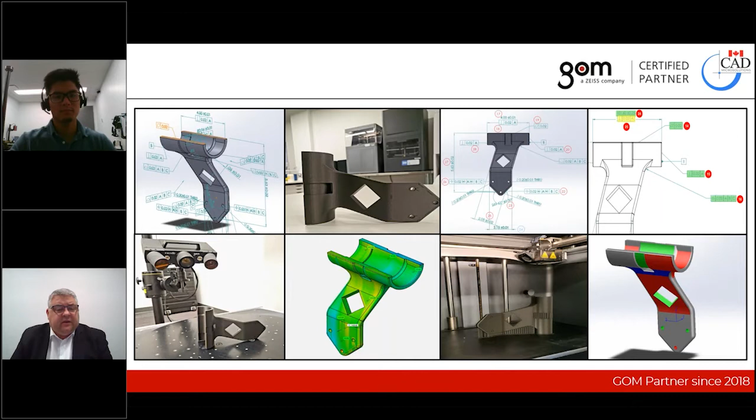We'd like to jump right in with three basic poll questions. It should just take us a few seconds to put together, and then we'll move right into the presentation.

So the first question here is, have you or your company ever investigated switching to MBD? If you don't know what MBD is, that's what this presentation is about, but it stands for model-based definitions. So either yes, no, or unsure, and then we can quickly go on to the next one.

How are you currently doing your FAI? So if you are involved with quality control at your company, and you've measured a part, whether it be by hand or CMM or a gauge or a robot, how are you currently doing your first article inspections? We're just curious about that to gauge the audience, whether it be a Microsoft Excel form, a report, a stats package, or other. Your input on that would be greatly appreciated.

And then we have one more quick question. Do you know SolidWorks MBD and inspection work together? A difficult question because if you don't know what MBD is, you don't know if it can work together. But essentially, yes, no, or not sure, because we're going to show you how they can work together afterwards.

All right, so at this point, we're going to get started. In this presentation titled Structured Framework for Engineering and Inspection, we are going to focus on the new features of SolidWorks MBD and SolidWorks Inspection, including features within the add-in modules and the standalone client modules. We'll also be showing you how these two things can work together. Lastly, we're going to illustrate how these new features can be used with additional tools to create a robust, closed-loop inspection system. Many of the roles required to carry out this closed-loop system include team members from both engineering and inspection departments. We'll also highlight how some of the tools touch other software packages where the user can exit or continue on with the loop. Let's get started.

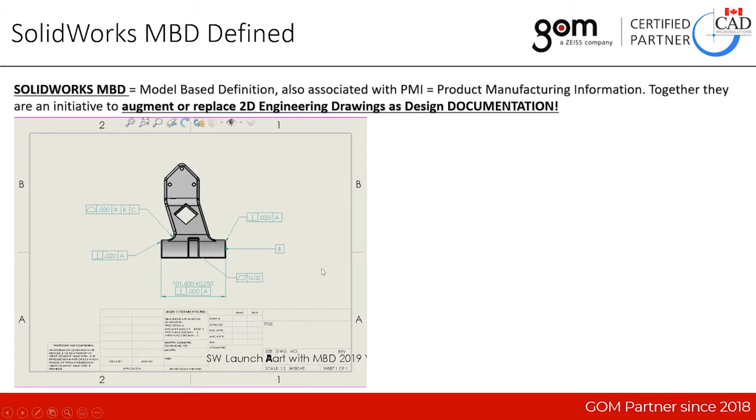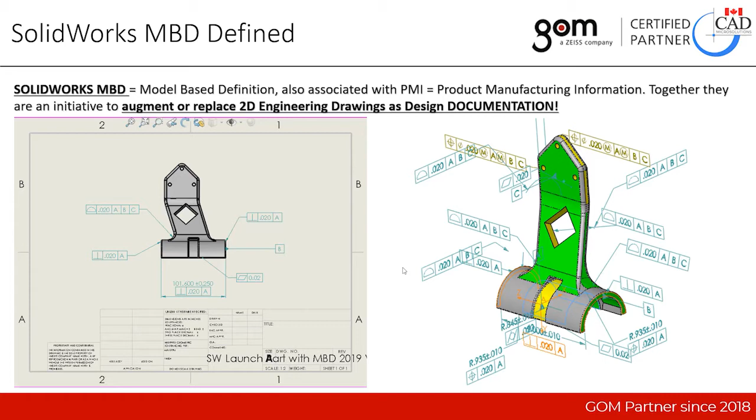SolidWorks MBD is model-based definition. It's also associated with PMI, product manufacturing information. Together, they are an initiative to augment or replace 2D engineering drawings as design documentation. What that means is we've traditionally looked at parts with 2D prints. Obviously, the more complicated the part, the more complicated the print. And we're transitioning from this sort of documentation into MBD, which is tagging all of the 3D attributes on the part with their related dimensions, GD&T, or notations.

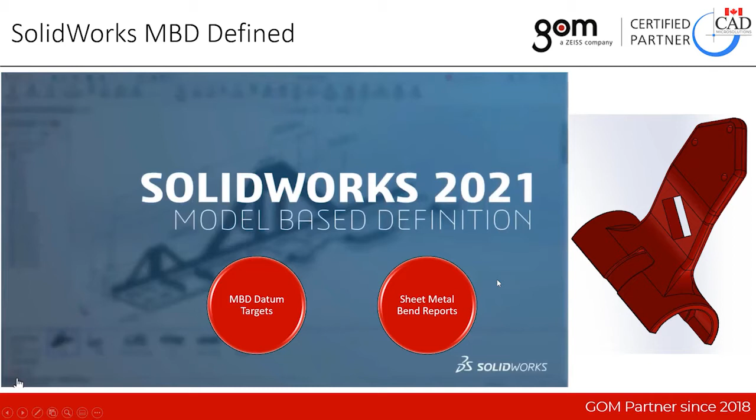SolidWorks 2021 model-based definition has two big upgrades: one called MBD datum targets, and the other sheet metal bend reports. Now, in the part we're going to be carrying throughout our presentation, this plastic injection molded part that the additive manufacturing group used in their presentation, and we'll be sharing this afternoon as well, it obviously doesn't have any bend reports, and if you'd like any information on that, you'll be able to find it on the web later. So we're going to focus on the MBD datum targets and show you one of the really nice, cool new features in 2021. So let's switch over to SolidWorks 2021.

And here you can see the same part with several pieces of MBD already tagged on it. And to show the new datum target feature, I'm going to zoom in on datum C here, which you can see is this small plane.

I'm just going to go to my MBD tab and select datum targets. Now what's interesting is, why would you use a datum target?

These are often used if you want to define inspection points or assembly points or anything like that. You're able to identify regions on the model where you want to pick. You simply assign where you want to put the label. You can do some more advanced things, such as assigning a target radius that the target has to lie within, and then just a location for the flag.

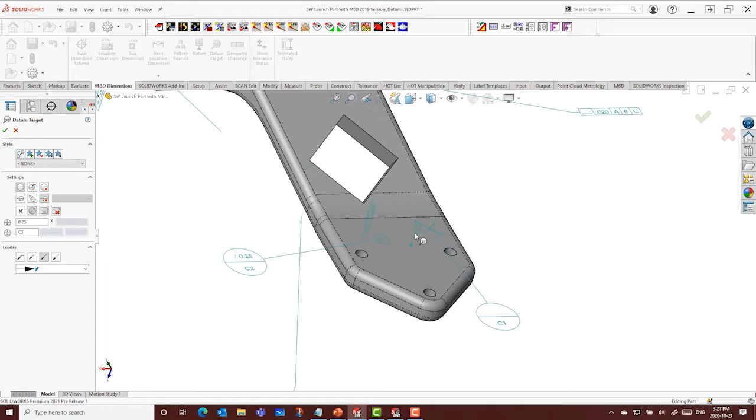What's interesting to note here is that you can also use your standard SolidWorks toolkit and actually assign parametric dimensions to these datum target locations. So if I wanted to control where that target was relative to another feature, I use my standard dimensioning tools to assign where it needs to be.

So I'll just do that for each one, and again do that for the other one over here. So what it allows you to do is, if you've got applications where you want to assign datum targets to MBD dimensions or to your model via MBD, there's now a mechanism to do so.

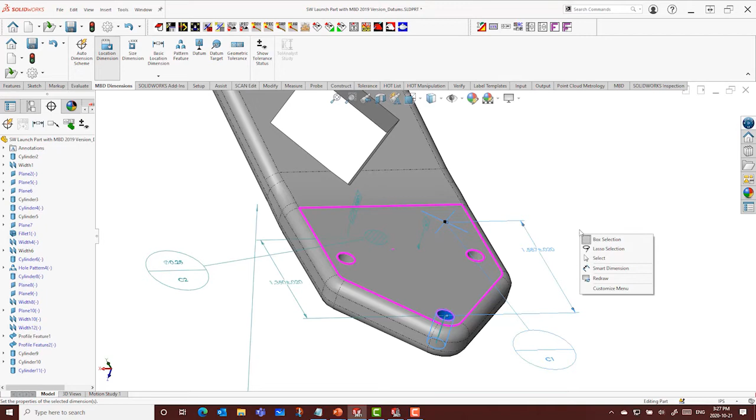While we're in this MBD world, I'd like to share with you another tip and trick that was recently shared to me by one of our partners, and that's the ability to balloon labels right inside of the MBD itself. So if you look at this kind of call out here, one of the things we'll be talking about is the ability for SolidWorks Inspection to do this.

But if I simply click on the dimension and look at the tree control, I can come down in here and actually use some new notation that was shown to me, where we can put some things in brackets. Whatever's in brackets is going to appear on the label.

I want the symbol to show a circle. I'm going to be identifying it as a number, and I'm going to start at the number 1. Very similar to what you may see in SolidWorks Inspection and the ballooning, we can also put these tags on the MBD dimensions as well.

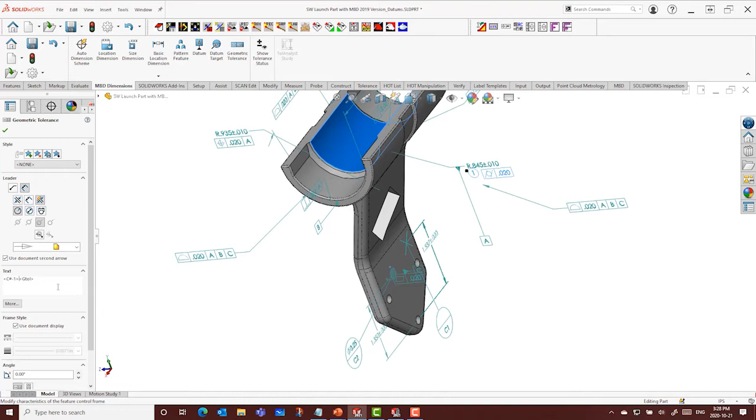Now we have to do it one at a time, but it's still a valid way to do it. And you can see there that I've now put the number 1 sign on that concentricity. A really nice new little tip and trick feature.

So if I wanted to do that again, I could just come down here and add the necessary file structure to do that. I want, in a circle, a number, and this time I'll call it number 2. So that's another neat way to uniquely identify different characteristics or dimensions that you want to control at the MBD level.

And again, whenever you're doing projects like this, because they're all SolidWorks objects, one of the really nice things we can do is, if I just capture this view as an example, I'll say capture 3D view and hit OK.

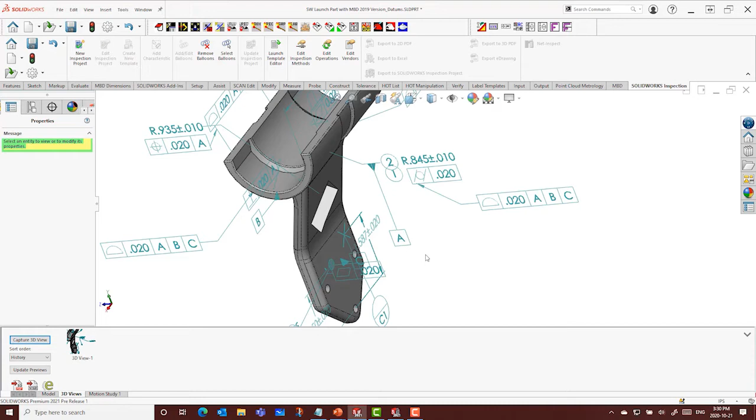What I would like to share here regarding the MBD and the new features is you can also post this out to eDrawings. So if I go out to produce a generic eDrawings report out of this, you'll notice on the back end when it appears, I've got the new datum target symbols and some other special new features about how to interact with the MBD inside of an eDrawings.

So a nice way, you can obviously recall specific views that you had in the drawing before. If you highlight dimensions with the balloon, it shows you on the model which ones. So a great way for you to share between OEM and supplier the dimensions that you want to control and how to communicate that information without having to do it the traditional route of Excel sheets or things like that.

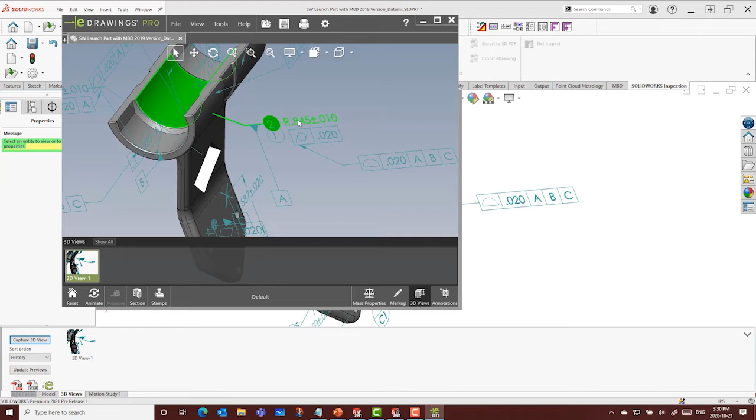So I just wanted to share those two additional things with you. Again, the major new upgrade inside of our update in SolidWorks 2021 for MBD is the assigning of datum targets and being able to dimensionally control them with standard SolidWorks tools.

So without further ado, we're going to move on to what is SolidWorks Inspection. I'm just going to jump back into my PowerPoint presentation. And what is SolidWorks Inspection? So you've heard me mention that we can already assign balloons to things and control elements to objects.

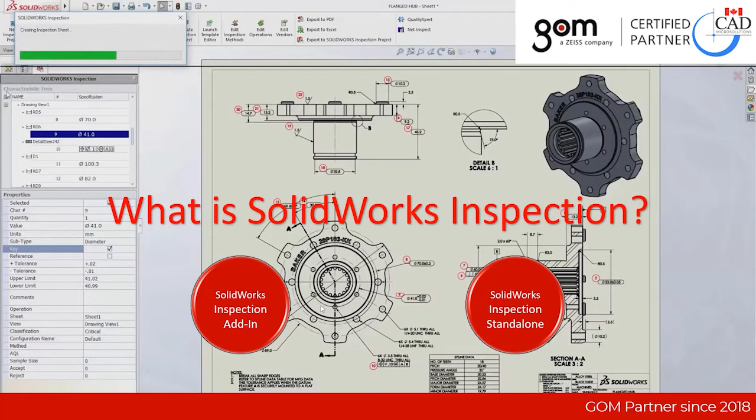What is SolidWorks Inspection? SolidWorks Inspection is used to create documentation to communicate dimensional or inspection requirements. At a high level, it balloons your drawing. So ballooning at the MBD level was one way to do it. Doing it with these red targets now is another way.

It's a separate software module, but it has a lot more value-added features than just putting those balloons on there. You can do it with SolidWorks drawings, or actually drawings and PDF files from external to the SolidWorks community as well. So if you've just got a PDF file, you can use SolidWorks to do this as well.

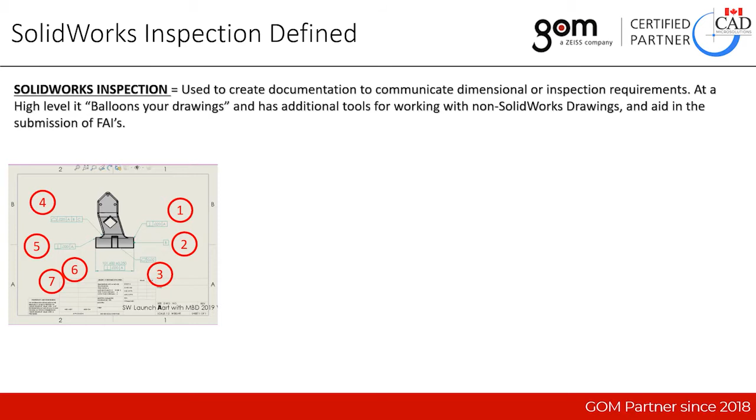Traditionally, what this looks like is you can bring in a PDF file. Here's the same one I had on a slide before, and go through the process of assigning a number to these drawings. The reason we do that is we give these marked up drawings to inspection, or to our supplier, or to an inspector, to say we want you to check dimension number 1 first. Give it to our CMM programmer to say, when you program this flatness, it has to have this number on it, so we can identify on the CMM report or inspection report and have a correlation between the two.

Regardless of whether it's manual or DCC type programming, the output is obviously to produce an inspection report that shows if the part or process is good or bad, and link that back to the dimension numbers. You can see these don't really align, because I've got 9 over here and only 7 over here, but it's just an example.

So again, we often have to produce those first article inspection reports, or FAIs, and either include them with our part, or send them ahead of time so somebody knows what we're shipping them was checked, and there's traceability to that. After all the approvals, it's obviously ready to ship.

The challenge with that current method of ballooning drawings, writing CMM programs, and producing Excel sheets with specific layouts is that they're very time consuming. It's something that's been done a long time, and people are transitioning away from this manual type approach. SolidWorks Inspection is designed to automate this and contribute to the overall workflow right to the point of traceability.

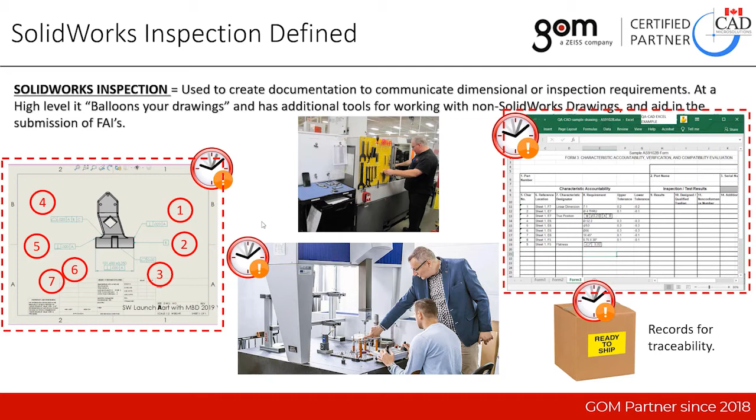Again, SolidWorks Inspection is not related to the actual inspection of the part—you're still relying on tools, calipers, CMMs, and gauges to do that. We're going to leverage the front end and the back end of that data flow to capture and share the information correctly. So, what's new in SolidWorks 2021?

There's been a couple of small additions, and then we'll do a live presentation on what I think is the biggest value-added function. In the SolidWorks Inspection add-in, there's actually a new template folder structure, so that if you've got multiple users, multiple environments, or multiple computers pulling off the same source, all your inspectors and people can be pulling from the same template file, with a bit more value-added control to allow you to control those templates.

It's a really nice new feature on the add-in side, and I'll show you a little bit of that in a few minutes. On the inspection standalone, or what I call the client side, there's been two really nice upgrades. One is these new VDA type target symbols—it's just a type of symbol where instead of just putting a circular dimension, you can now put a VDA style balloon.

Another feature here is the grid function. The grid is now customizable, so it's really nice—you can control the number of grids in both the vertical and horizontal plane, and go from there.

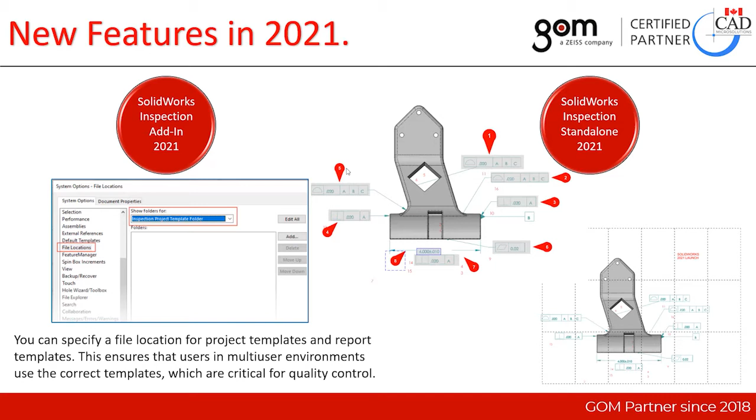What I'd like to show you is what I think is my favorite new feature of SolidWorks Inspection, one I think you'll get a lot of use out of. I'm just going to switch over to my client here. So here I am in SolidWorks Inspection 2021, and I'm going to start a new project, and select just my default template. What's new—in the past we would have typically picked off of PDF drawing files, or SolidWorks Inspection 2D files generated from the add-in function. What's new in this version, and you'll see at the very end, is the ability to open up an actual SolidWorks part file. So I'm going to show you this really cool new function—I'm going to pull it from my demo files, call it for the client, and hit open.

Yes, I know I'm in beta mode.

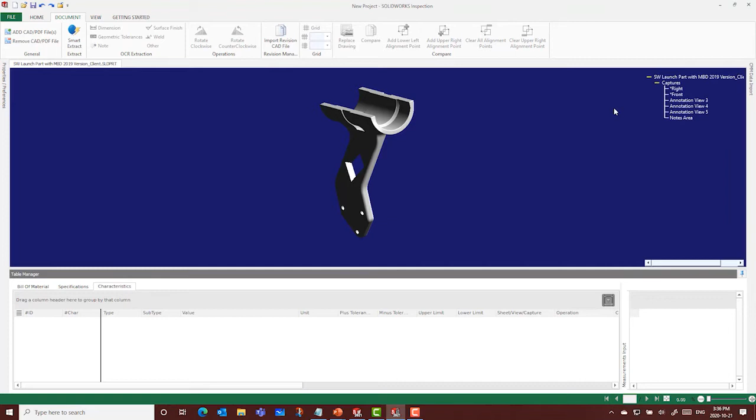What you'll notice is that we get a 3D model view from our SolidWorks file. Right now it looks pretty plain, but if you notice up here, we've got a new pull down. When we click on it, we can double click to get it in the view that we want, and it'll show all of the dimensions, all of the MBD associated with that view.

We can then right click on it and say extract dimensions. A really nice new function that goes through the database, goes through the SolidWorks file, reads the MBD functions, and creates the layout for us. It creates this kind of report file that we can link to and do other things with once we've actually measured the part. A very, very cool new feature.

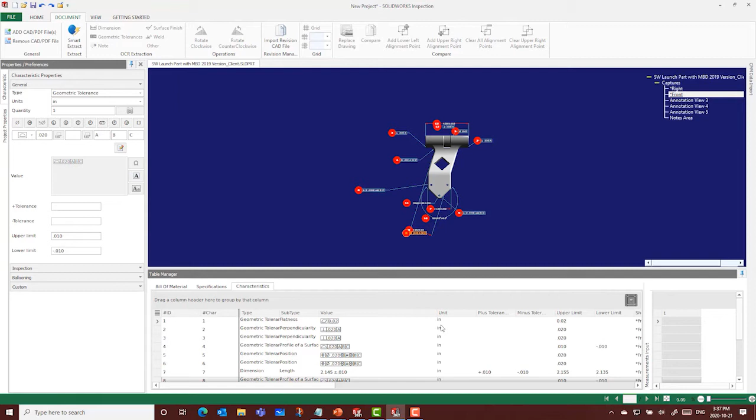If you've used MBD on your model to begin with, you can leverage that information downstream. Rather than having to create 2D drawings and all the associated work, which SolidWorks inspection can do on its own, you can go straight from SolidWorks with the MBD in it right into the client and save a lot of time and money. You can create all your standard reports, PDFs, and documentation from here.

What I'm going to do is take a step backwards, because we've taken a big step forward showing you this new function of how, on the client side, we can take advantage of MBD and SolidWorks inspection together.

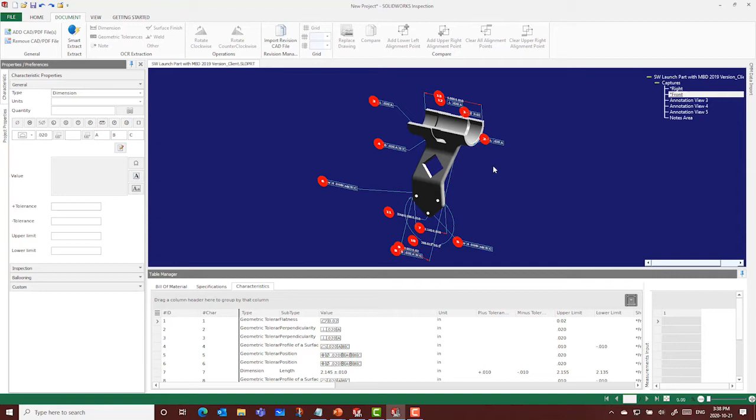I'm going to loop back into my SolidWorks inspection folder, my SolidWorks main view, and show you how that can also work in design mode. I'm going to close this one, don't save, say file open, and open up the full part model this time.

It's got a lot of MBD on it, we just cleared some of those things up. One of the neat things you can do with this same MBD, a small part with lots of information on it, is use SolidWorks inspection. This is where we use the add-in to walk through our CAD model and assign balloon numbers.

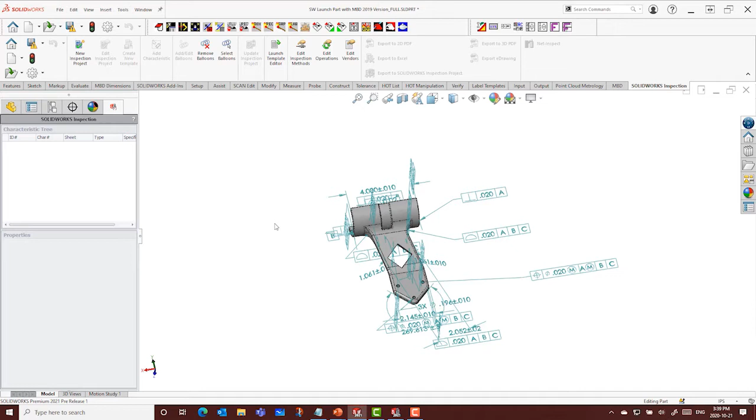Based on the objects, so you may or may not have seen this before. SolidWorks inspection has been used a lot at the 2D drawing level, but you can see it's actually going through and labeling everything associated with an MBD function — using SolidWorks MBD and SolidWorks inspection together.

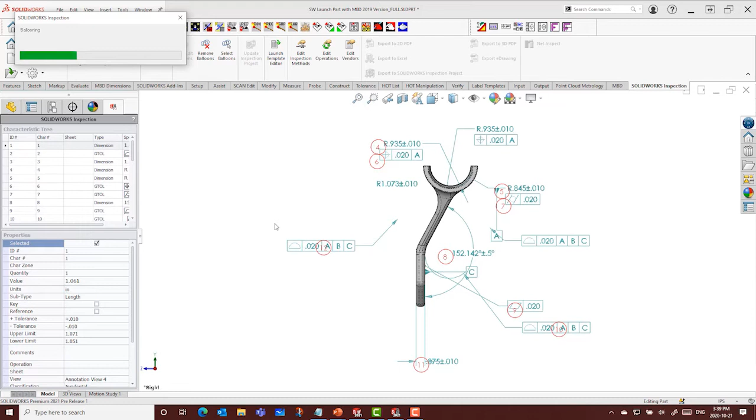The really nice thing is that it's doing this in 3D space, saving each individual view. So if we went out into e-drawings, it would save all those views — great for sharing information that way. I'll just let it finish up here and spin it around.

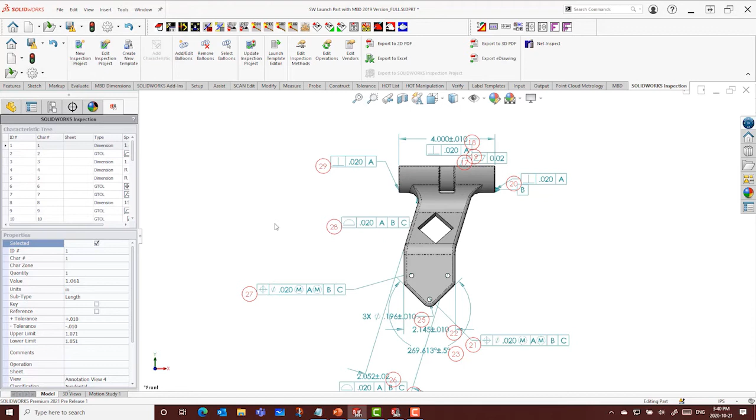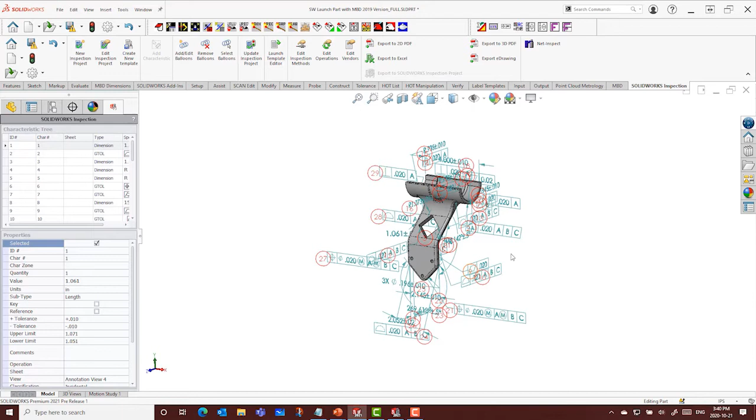So you can see now that we have all of the balloons, and you can export straight to an e-drawing from here. We can publish to a couple of other different formats for producing FAIs, because we haven't actually measured anything at this point.

That's a great segue, because now that we've shown you a couple of new features of SolidWorks and how this impacts downstream, the next step is we need to go through the measuring process. I'm going to introduce David from our team, and David's going to show you how we would take a model like this with MBD on it and use it in the inspection process.

Thank you, Rob, for the introduction. Good afternoon everyone, my name is David, and in this portion of our presentation I'll be taking you through how we can use 3D scanning technology to go from a physical part that we have, and in a matter of minutes, arrive at a full inspection report that lists the quality of our part through the use of inspection capabilities in GOM as well as SolidWorks.

So to start off this presentation, let me first take you through an introduction of who GOM is as a company, and talk about the type of technologies that they provide from the world of 3D scanning and inspection.

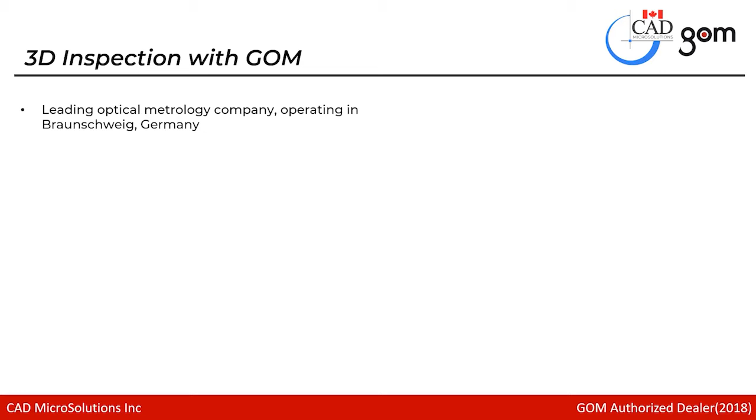GOM is a leading optical metrology company currently operating in Braunschweig, Germany, and they offer contactless, accurate inspection capabilities through the use of optical 3D scanning technology. They provide rapid, high-resolution capture of data through the use of these 3D scanners that make use of specialized cameras.

As well as fringe projection technology in order to produce a detailed point cloud of the data. Once we have this 3D point cloud, we can polygonize it to turn into a smoothed out mesh, which we can then use in the GOM Inspect software to calculate our measurement results. So whether we want to check for common elements such as dimensional analysis, GD&T characteristics, we can also do full 3D surface comparisons as well as material thickness plots, create inspection sections to analyze across a certain plane, and much more through the use of GOM technology.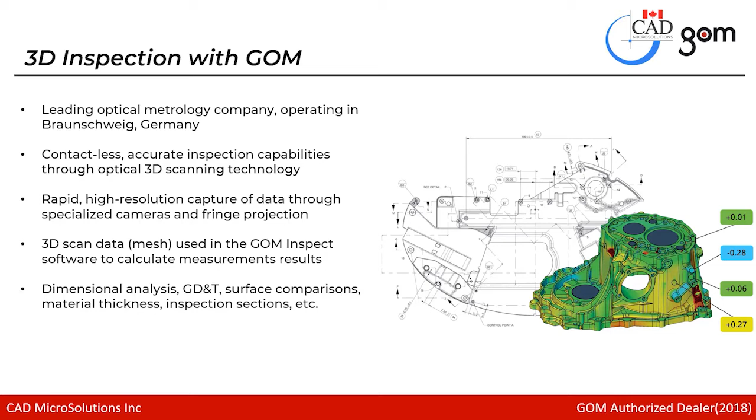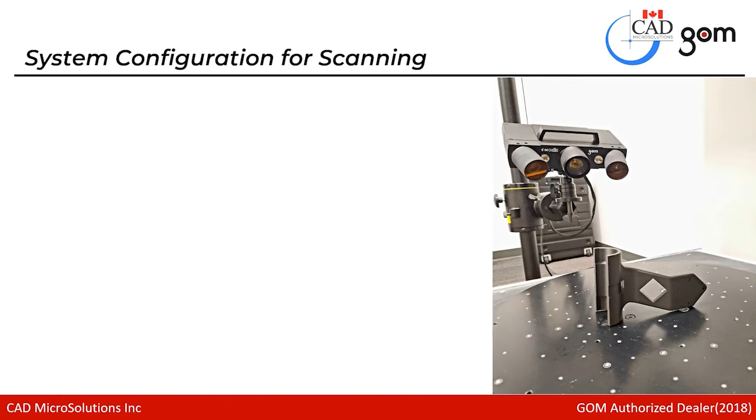Now that we're a little bit more familiar with GOM as well as the type of solutions that they provide, let's take a look at an example of a system configuration that's used for 3D scanning. Here we have a picture of the setup that was used to scan this part, and we'll quickly go over the different components that make up this overall system.

First up, we have our ATOS Q 12 megapixel sensor, which is able to capture 12 million points of data with a single scan, and it's installed with a 500 millimeter measuring volume. The measuring volume simply pertains to a boundary box of which the part that we want to scan must fit inside reasonably for us to be able to capture all the geometry of the part in an optimal way.

In order for us to be able to scan larger or smaller objects, we would need to adjust the measuring volume of the sensor accordingly. This can be done either by changing out the sensor to one that has the appropriate measuring volume installed, or in the case of our ATOS Q, we have a flexible system where we can uninstall the lenses and then install a new set of lenses that will either increase or decrease the measuring volume as we need.

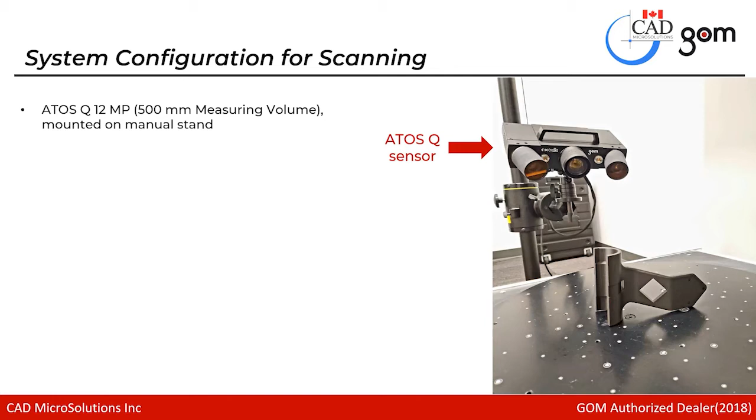Our ATOS Q sensor is also mounted on a manual stand that we use to reposition the sensor itself. So whether we want to change the angle of attack or if we want to increase the height or depth of the sensor, we can do this with the help of our stand. The reason for this is so that we can get our camera to be able to be placed in the optimal view to capture the remaining geometry that wasn't able to be picked up by previous positions.

Next up, we have our automated rotation table that's synchronized with our sensor. The reason we have this table is so that we can automatically have it rotate the part to get it to a new scan position. Then once it arrives at its new position, the sensor will automatically go ahead and take a scan of the part.

So we can program this in the software to either run a set number of increments out of a full 360 rotation and repeat that as necessary, or readjust the programming as necessary to capture the data in the most efficient manner. This is all connected to our computer, which is running GOM Inspect Suite software. The software is used for system operation as well as for inspection processes later on once we capture the data.

You'll notice as well on the table itself that there's a number of different markers that have been placed, and these are known as reference points. Reference points are used for the purpose of tracking, self-regulation, and to combine separate scan series.

These reference points are the system's way of determining where it has moved in relation to the original position of the part, so that no matter where we position it, whether we reposition the sensor with our stand, or if we rotate the part with our manual or automated table, the software is able to always have that recognition of its orientation relative to the part. This way, whenever we take a new scan, it knows exactly where that new scan needs to be located because it has that knowledge from the reference points.

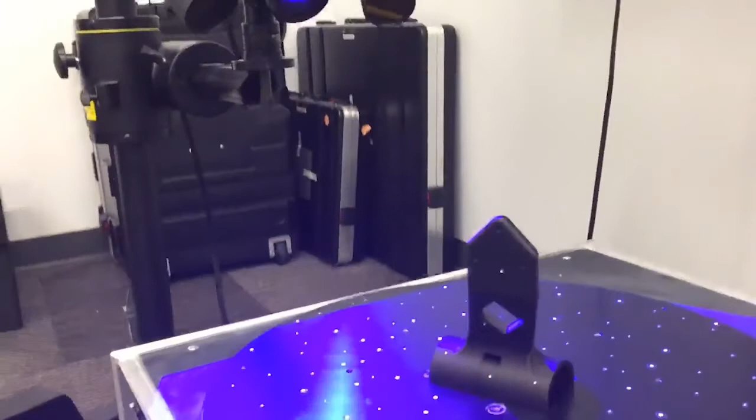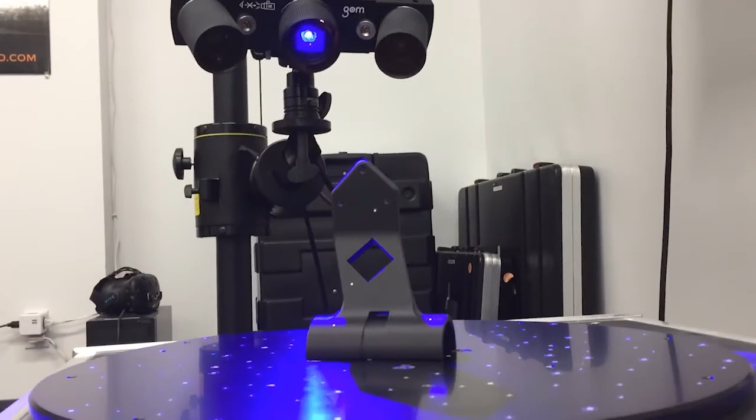Here we see our ATOS Q being used to scan the part with our automated rotation table. The Q projects a blue light fringe projection pattern across the surface, and based on how these patterns deform according to the surface geometry, the cameras on the left and right calculate 3D point clouds of data to populate into the software.

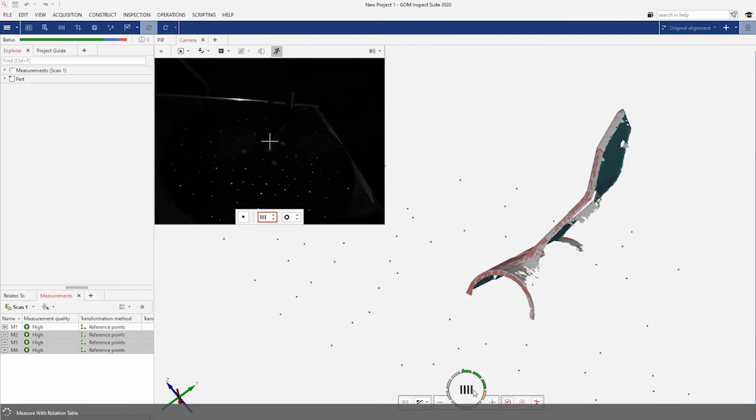Now that we've switched to the software view, you can see those reference points on the table and the part being recognized with a unique value. As we move through the 10 different positions of this full rotation, the sensor knows exactly where it has moved relative to the part, and the software puts the new scan data into the correct positions as we see here.

We continue this process to capture any geometry not picked up by previous scans, by either repositioning the sensor or repositioning the part, and continuing to scan until we're satisfied with the results.

Now let's take a quick look at how we can transform scan data to align them into a single source, and then polygonize the result to create a final smooth mesh profile.

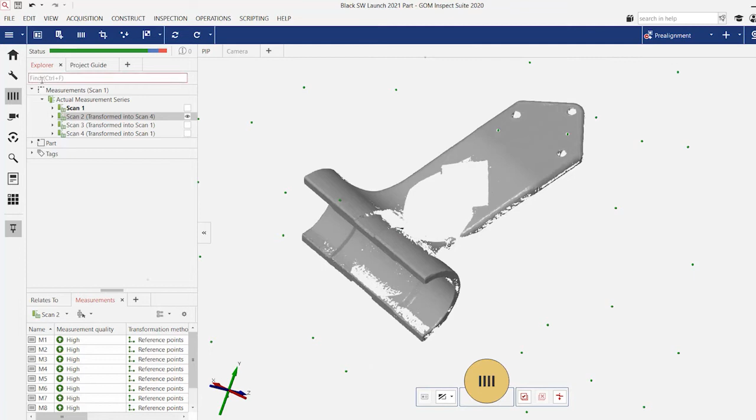Let's begin with transforming this scan's data. Here we see the reference points marked as green dots in our software. All we have to do to transform this data into a different scan—let's say scan number 4—is click at least 3 common points on our part.

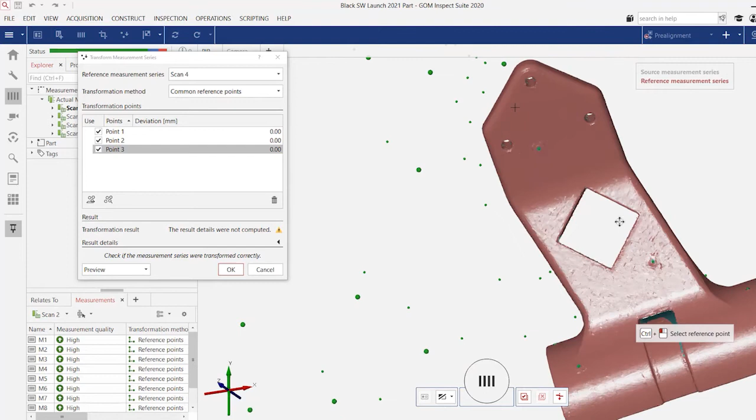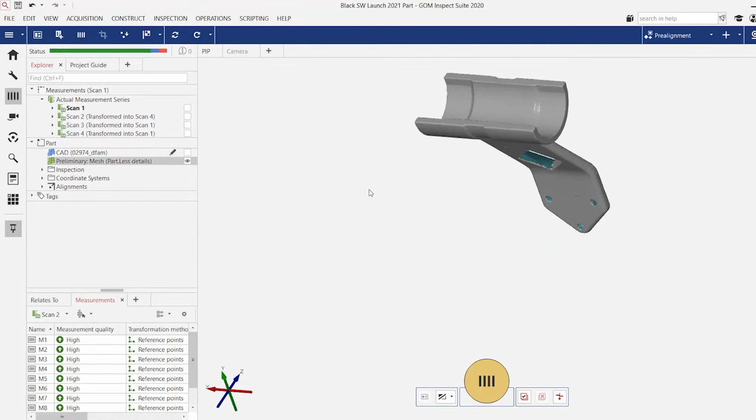Using those 3 common points, the software matches up the respective 3 points on scan 4 and combines the two to create a single source. We continue this process with all the other scans until we have a single data set combining all the different scans into one uniform mesh, like we see here.

Now the last step, once we're satisfied with the data captured, is to polygonize. This process simply turns the point cloud data into an actual triangulated mesh, and we have a number of post-processing options. Typically we just use the standard operation, so we'll go ahead with that, and in a minute or two we'll arrive at a final smooth mesh profile.

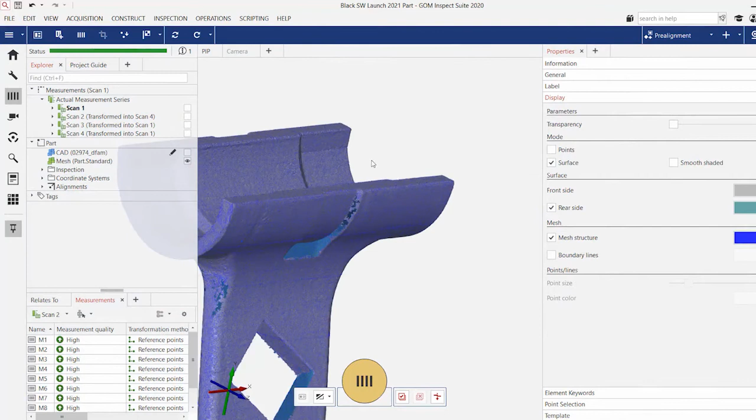So now that we've completed the polygonization process, we can see that we have arrived at a final mesh profile of the part. We can even take a look at the actual mesh structure just to look at the point density that we have with our high resolution ATOS Q sensor. This allows us to very accurately capture all relevant data.

We can use this to either measure the part or process it for other operations such as 3D printing or reverse engineering in a CAD software package. So up to this point, we've covered in detail how to leverage GOM's 3D scanning capabilities to create a digital copy of our part in the form of a 3D mesh. Now in this portion of the presentation, we're going to discuss how you can combine GOM's inspection capabilities with SolidWorks MBD and inspection to create a seamless transition from 3D design to 3D inspection.

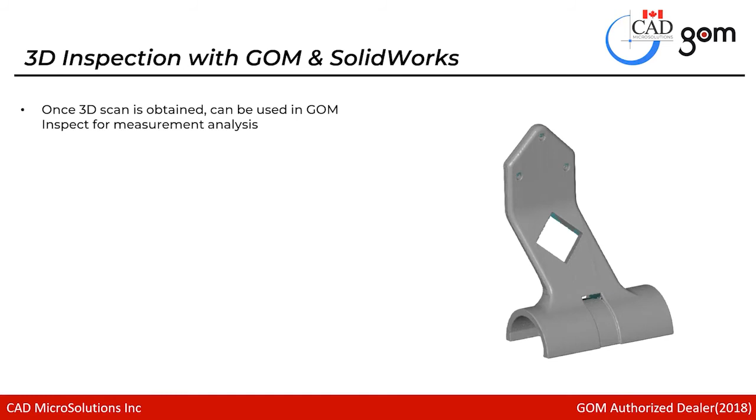Once we have our 3D scan data of the part, we can use it in the GOM Inspect software for measurement analysis. In GOM Inspect, we can create different inspection elements directly on the mesh model itself, whether we want to check for different dimensions, apply GD&T characteristics on certain features, or calculate things such as material thicknesses, surface comparisons, section outlines, and much more.

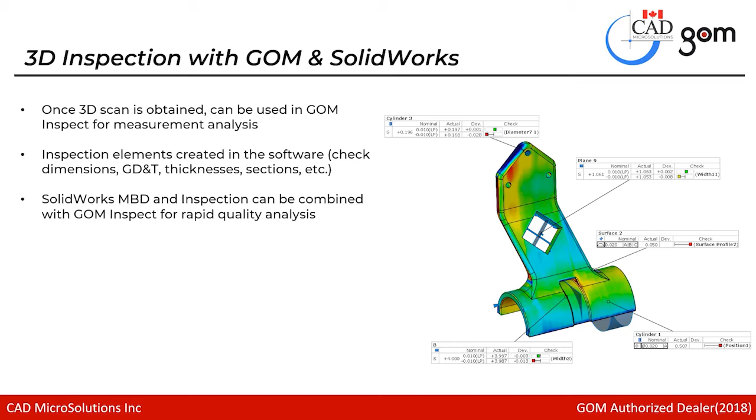A great feature we can leverage with GOM Inspect is the capability to combine it with SolidWorks MBD and Inspection for rapid quality analysis of our parts. So let's take a look at how exactly we can leverage all three of those different software packages to combine into one single solution. First, we start off with SolidWorks MBD, where we have our 3D CAD model of the part.

Here we can apply our critical product manufacturing information directly on the model itself. So here we see an example of the CAD model with all the different PMI that's been applied onto it. Once we are satisfied with all the PMI we have, we can export it as a Step 242 file from MBD, where it will embed all this information into the intelligent step file that we can use in GOM Inspect Pro.

Once we have this PMI enriched CAD file from MBD, we can load it into GOM Inspect Professional to have the software automatically create all of our inspection elements for us and calculate the results once we align it to the mesh data.

Finally, once we have our inspection results in GOM Inspect, we can export these results in the form of a CSV file to be interpreted by SolidWorks Inspection Downstream, which we can then use to verify our design and create our first article inspection reports.

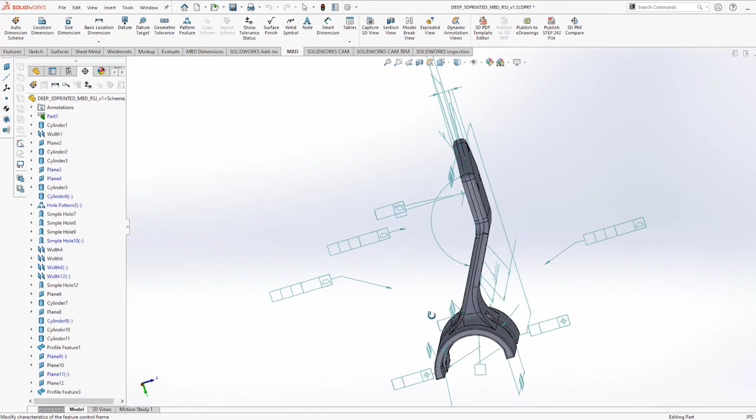Now let's transition into a demonstration of how we can combine all three of those different software packages to create this cohesive solution. So now we have SolidWorks opened up with our MBD add-in enabled, and you can see that on our 3D CAD model, we've already applied all the different PMI on the defining features of this part. We can see different elements such as dimensions, angles, GD&T characteristics, as well as datum references that the GD&T refers to in its check.

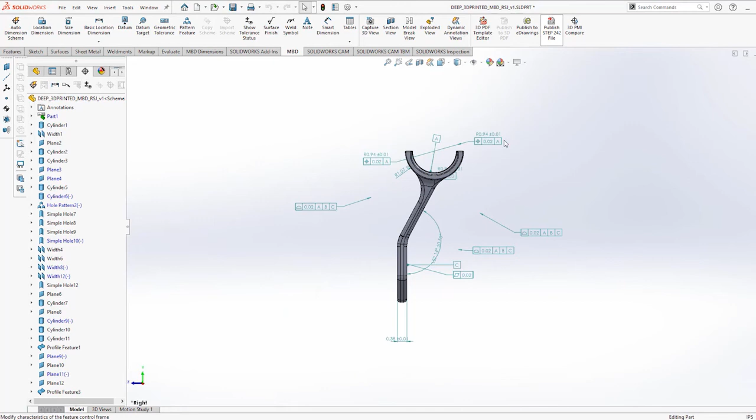Once we've completed the application of all these different inspection elements, we can then publish it from SolidWorks MBD directly as a Step 242 file, which again will embed all of the information created here into a single step file that will then be used in GOM Inspect Professional to automate the process of creating these different inspection elements.

Now we've switched over to the GOM Inspect software, where we have our 3D scan model already loaded in the project. All that's left to do is simply bring in that PMI enriched step file that we created from MBD and import it into GOM Inspect and add it to this part. As soon as I do this, you'll see that the CAD model appears on the graphics window and the software begins to create all the different inspection elements that were created from the MBD portion of the software.

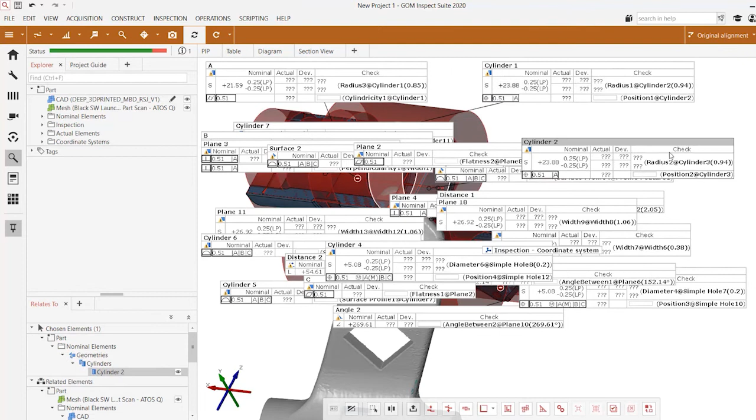We can see that each of these different elements have now been populated. All that's left to do is simply align the mesh data to our CAD data in order to create the relationship between the two and then compute the inspection results we want to see.

So now that we've aligned the CAD data to the mesh model, where you can see that the CAD is represented in blue and the mesh in gray, we can then also check the status of our results coming from the MBD that was applied in SolidWorks.

So you can see on the left-hand panel that under inspection, we have all the different GD&T characteristics listed, as well as the dimensions that were applied from SolidWorks.

So if I turn on the visibility of some of these different elements, I can start to see the results of the inspection. And you can see that we have a nominal value, which represents the ideal value that was calculated from the CAD model, and then the actual value.

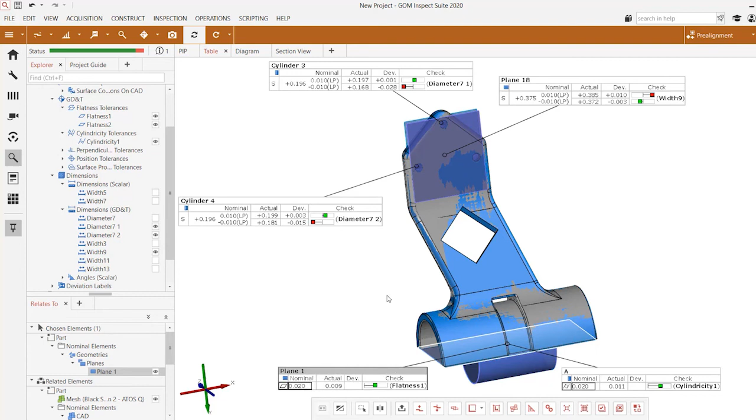So the value of that check as it pertains to the mesh instead of the CAD. And there we can calculate a deviation from the nominal to the actual. And we have a quick visual representation of the tolerance check to see whether we are within or outside of tolerance.

So this process allows us to very quickly go from the 3D design stage, where we've modeled our part in SolidWorks, use the MBD portion of the software to apply our inspection characteristics, and then leverage that model that has the PMI embedded inside to use it in GOM Inspect Professional and automate the process of creating each of these different inspection elements.

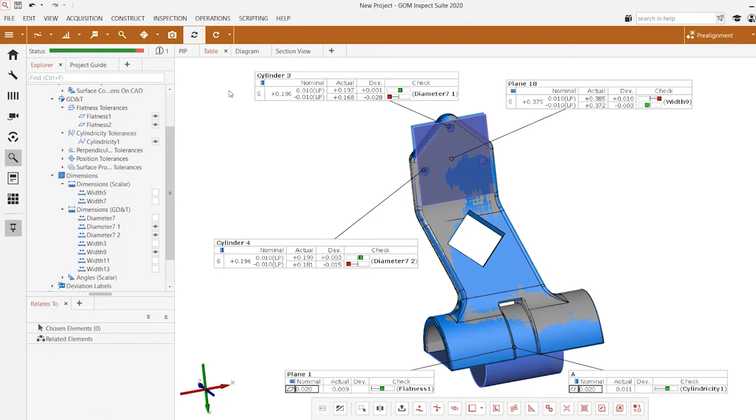Now, the final process in this step would be to export out all of these inspection results in the form of a CSV file that we can use in SolidWorks Inspection to load into a template and then calculate out all the results and have our first article inspection created for us as well.

So now let's quickly summarize the 3D design to 3D inspection process that we just analyzed. So first, we have our 3D CAD model that's created in SolidWorks and the PMI that's directly embedded in the file with the help of SolidWorks MBD.

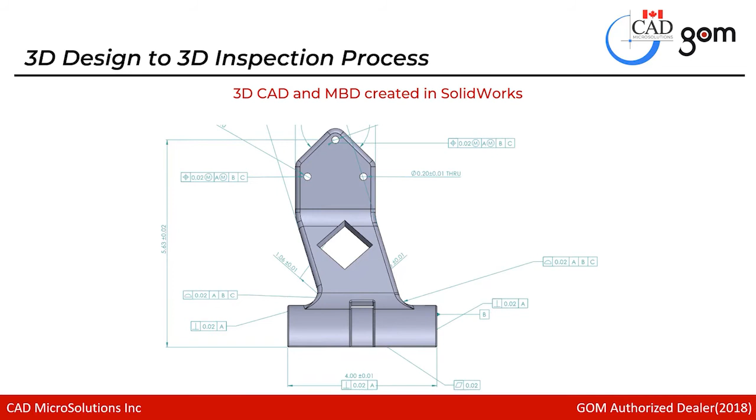With this PMI enriched CAD file, we can then scan the part to bring a digital copy of it into our GOM Inspect software and also import this step file with our PMI to have it automatically create all the inspection elements for us and calculate the results.

The final step would just then be to export out all of our results in a CSV table, which we can then import into SolidWorks Inspection to create our first article inspection report.

Now, to provide more detail on this last step, I'll pass things over to Rob to go over the process.

Great job, David. Thank you. And to start off on the last part of this presentation, we're going to loop back into the reporting side with SolidWorks and some additional options that way.

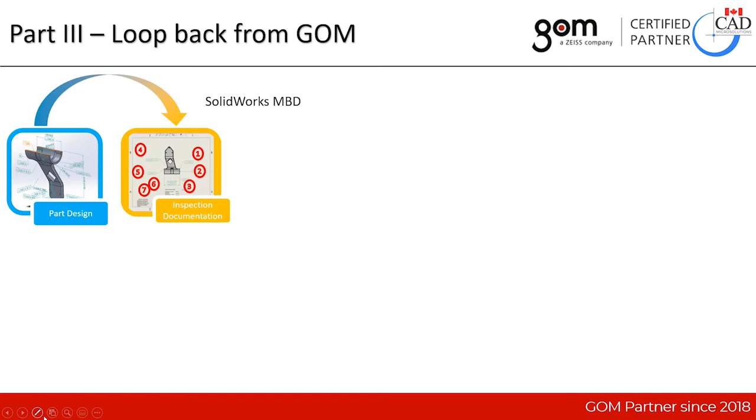So where we had previously discussed the part design, including MBD and all the new tools in SolidWorks Inspection, we've shown you how you can take that MBD file via step into a product like GOM Inspect that really produces three types of output. It's able to evaluate to the MBD for at-machine analysis or in-production analysis.

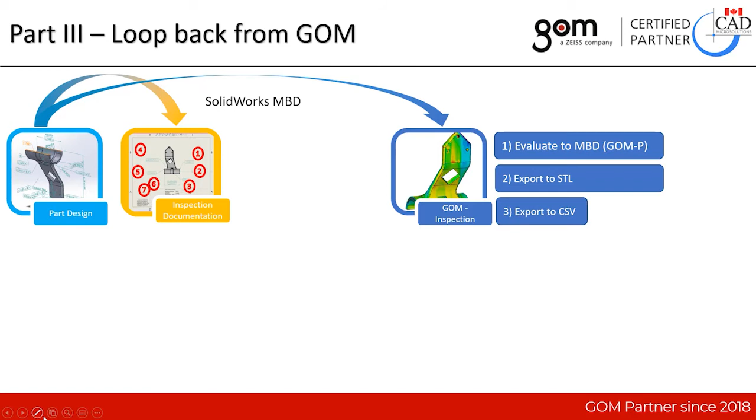It's able to export to an STL file or export the calculated results to a CSV. And that's a new enhancement that users should be aware of as well, that with this text-based formatting, one of the things we're able to do in the SolidWorks Inspection client is import those evaluations back into the system.

For first article inspection reporting, you can see here in the inspection software, we have a new option called GOM Import that is flavored to look for these types of evaluation and calculation files. And once it reads in that information, it's able to color code the deviations linked to the balloon labels.

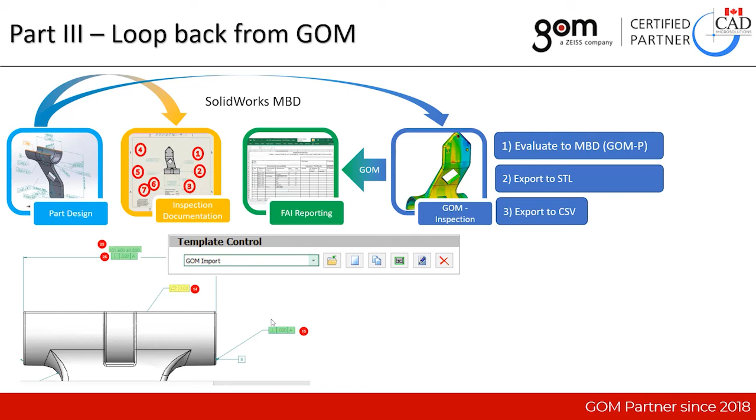So you're able to get not just an inspection report off of the GOM system, but also use the SolidWorks system as a reporting engine. That way, once you've got it in there, you can use the additional tools in the SolidWorks Inspection client, such as exporting to an FAI Excel sheet and additional tools like that.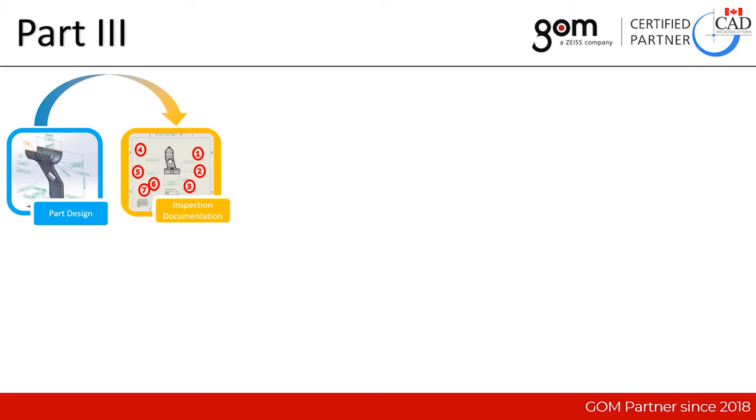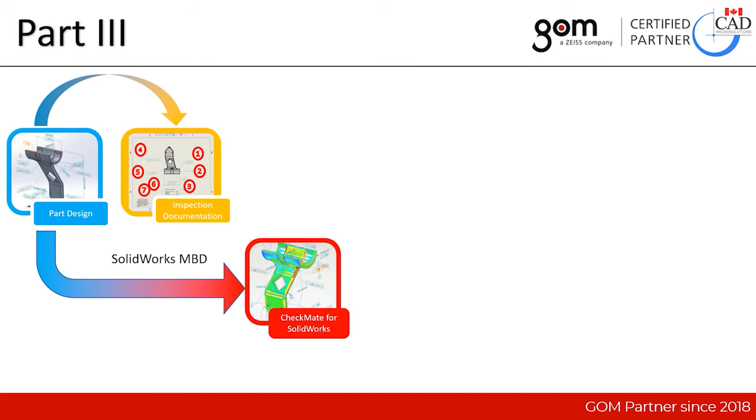Another tool that's new to CAD Micro Solutions is going to be shown here, where we follow the exact same flow of using MBD data and SolidWorks Inspection, but this time using a new product that lives inside of SolidWorks called CheckMate for SolidWorks.

Now this is a third-party add-on living in the SolidWorks community, and what it's going to do is allow us to import scan data or import CMM data into SolidWorks for analysis. So if there were strict restrictions that we didn't want to do reporting and analysis inside of a product like GOM, we have a new value-added feature to do all of this analysis inside of SolidWorks.

And we can also use that MBD infrastructure to actually write CMM programs. So not just import data, but actually use the framework for additional things like CMM programming. And from that imported data, we can also produce the same FAI reports that we populated in the other example.

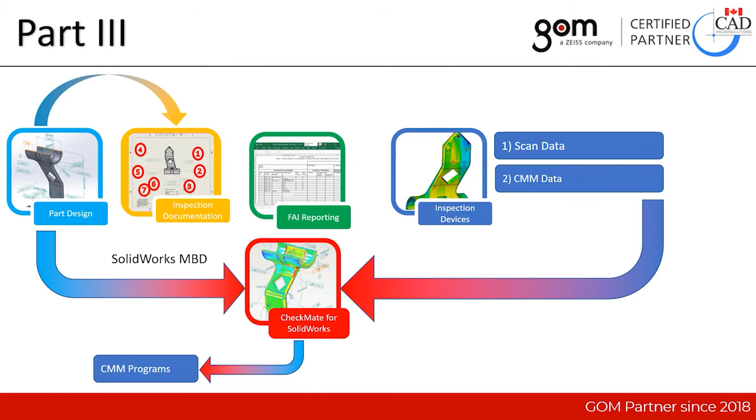So at this time, I'm going to switch over to this new software and give you a 3 or 4 minute demo of what it's like to use.

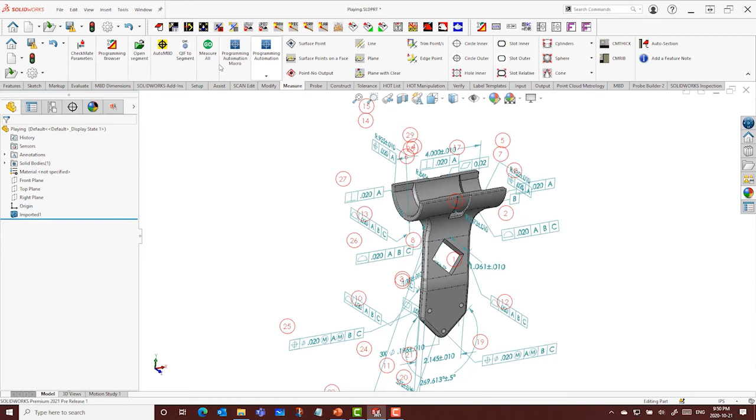So here we are in CheckMate for SolidWorks in 2021. It's the same file that we started off at the beginning of the presentation with embedded MBD and SolidWorks inspection balloons. And what CheckMate for SolidWorks is able to do is extract all of the information embedded in the model and convert it into what we call a nominal template.

And it's gone through the drawing already, it's finished, and it's converted all of the CAD objects into metrology objects, such as planes, cylinders, circles, lines, things that would need to be interrogated and measured on a typical CMM device or a GOM inspection device.

And you can see here's a browser or a listing of the feature. We call this the programming browser. And what you're able to do is see how the balloon numbers for the relevant features are all kept and carried across for future evaluations.

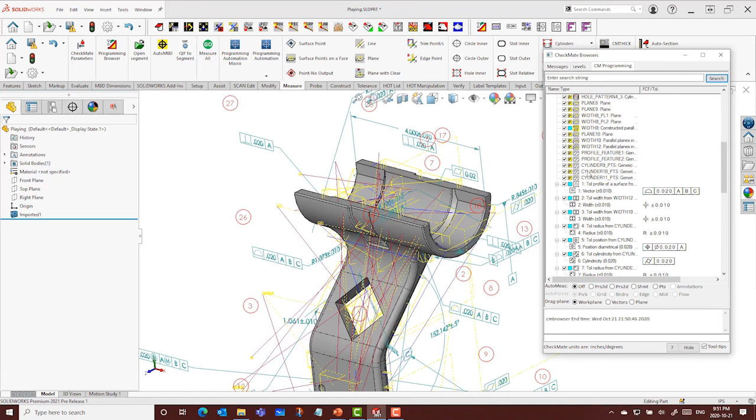So it happens very quickly. It's audited and does a one-for-one comparison. And at the end of that process, you've got a new template, not just the CAD, not just the MBD, but a metrology framework that allows you to communicate with many, many other devices.

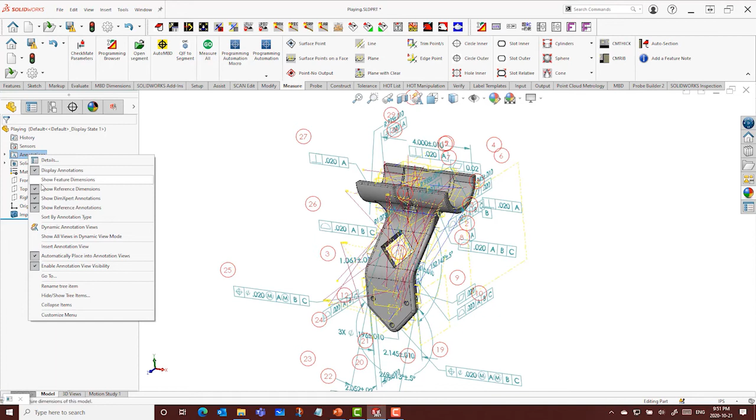There I am circling feature number 9, and you can see that feature number 9 in the drawing is the flatness evaluation. What I'm doing here is just hiding the annotations for a second, and you can see what it's done here. It's gone through and put kind of all these little pointers and dots on things where a typical CMM may hit the part to measure it.

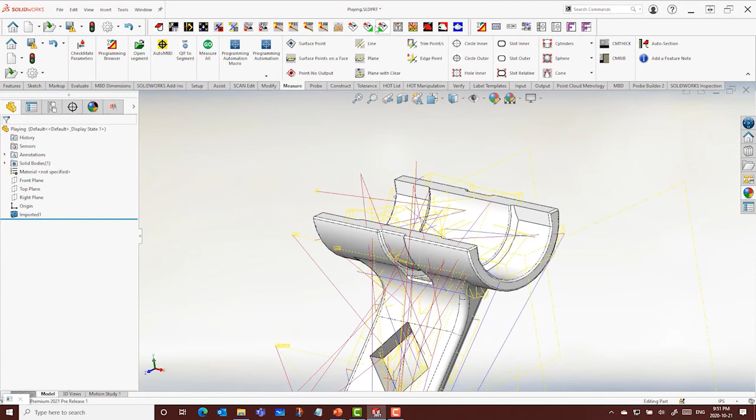So if we just hide that for a second, one of the things we're going to do is take that information and show you how you can output that program into a text-based program, just like a G-code for a router out of CamWorks or a G-code for a machine tool. We can output these into a variety of different languages and flavors.

There's me trying to write it to somewhere I shouldn't, and I'm just going to write it to my demo files directory. And at the end of this, you'll see on the screen a text-based, what's called a DMIS programming language, that you could simply move to any coordinate measuring machine for evaluation.

At the end of that evaluation, you get a report. You can then load that back in and do further analysis with it.

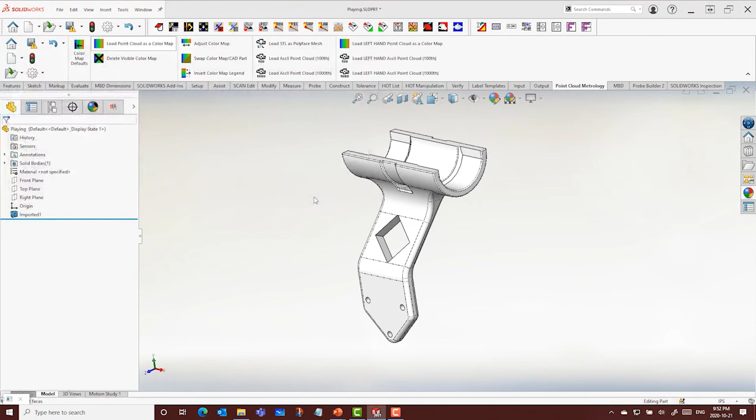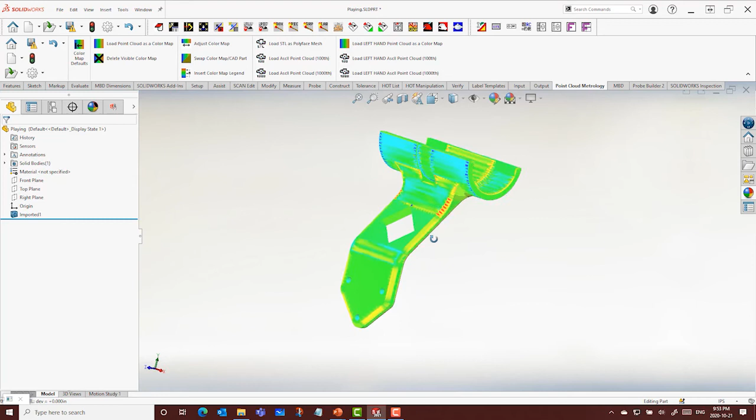Additionally, what you can do with this software package is load that STL file that was created by David—this is the exact one that he created—and we can load that into SolidWorks and use the CheckMate for SolidWorks tools to do part comparisons, part reports, GD&T evaluations, analysis and stack up evaluations, and all those types of analysis functions that happen outside of the CMM room by typical process engineers.

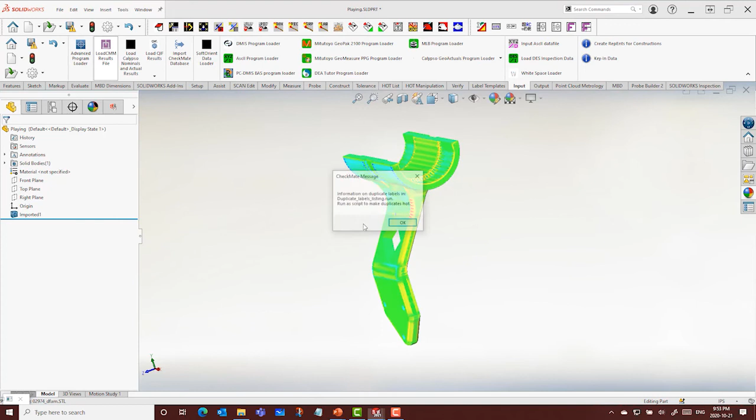So here's just a view of some of the chromatic displays you can do as well. And what we would then do is analyze the map, because right now it's just best fit on the model based on its geometry type.

And we would have it walk through the nominal template that it created and interrogate the point cloud and come up with all these evaluations that show you where it's done on the model and where the inspection types are. So some very powerful software that way, and we look forward to sharing it with you.

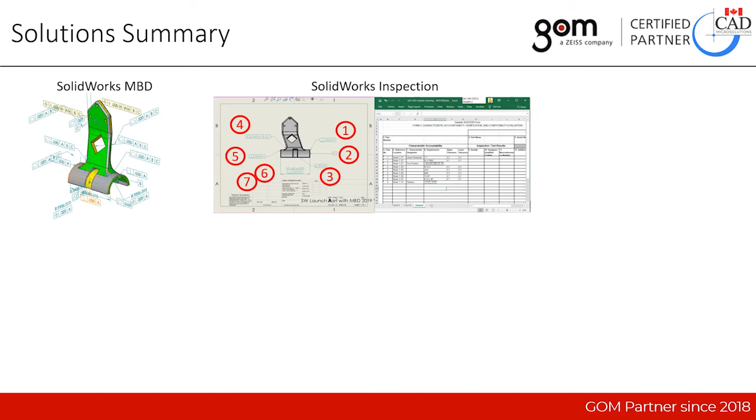All right, so this brings a conclusion to our presentation. And what we've shown you this afternoon is some new things about MBD, SolidWorks inspection, program-free inspection with our GOM systems. No need to write programs, just place it on the table, capture high-quality data.

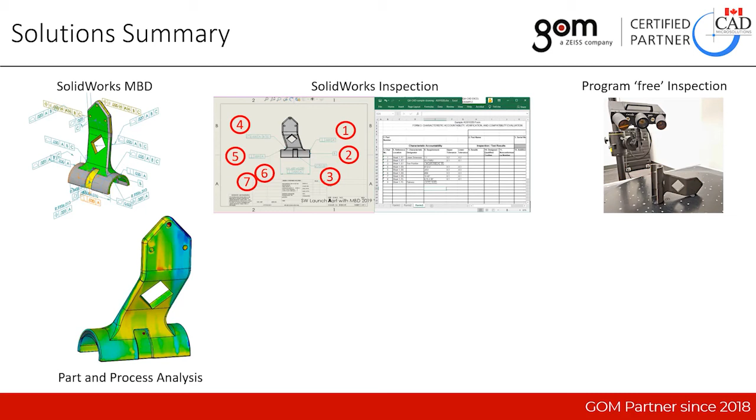A variety of different tools within GOM or CheckMate for SolidWorks for part and process analysis. A variety of different ways to produce first article inspection reports and PPAP reports. And stay tuned, in the future we're going to be linking all of this back into DELMIAworks for Industry 4.0 and transparency considerations by all the end users.